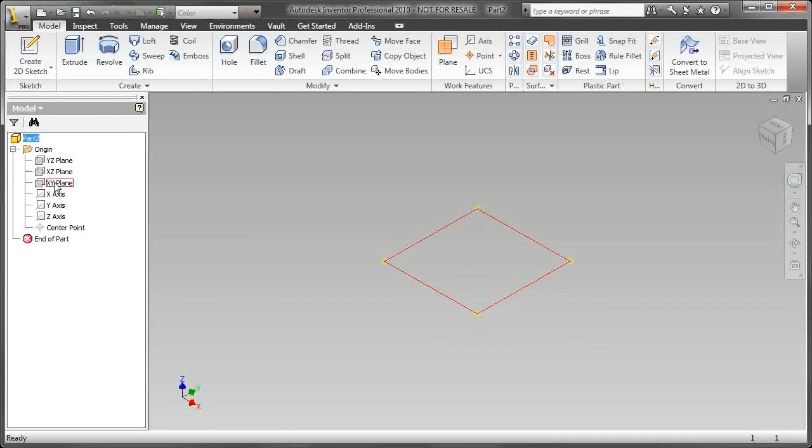Let's start a new part. I'm going to go to the new part file, and there's lots of different templates to choose from. I'm going to choose a millimeter part. And like I said many times before, I have my parts set up to where it actually prompts me to select the work plane that I want to start sketching on. And underneath the origin, we give you all the work planes that you need to start your part, as well as the axis and a center point.

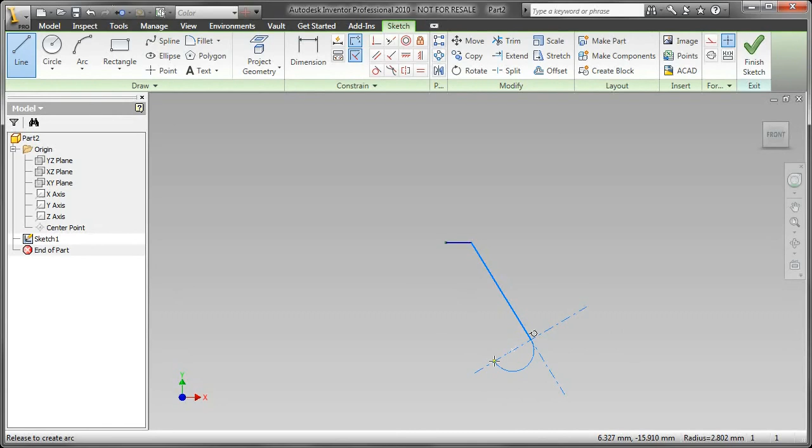Now, once I start sketching out, it automatically projects that center point forward. So when I start sketching out my lines, I have a reference point to 0, 0, and that's really important for me because I want to make sure that I know where I'm at in reference to the origin. So as I'm sketching out, of course, it's giving me horizontal, perpendicular, and parallel constraints, but it won't do all of them automatically. It does a pretty good job of doing most of them, but I want to do a couple equal constraints and a tangent constraint here.

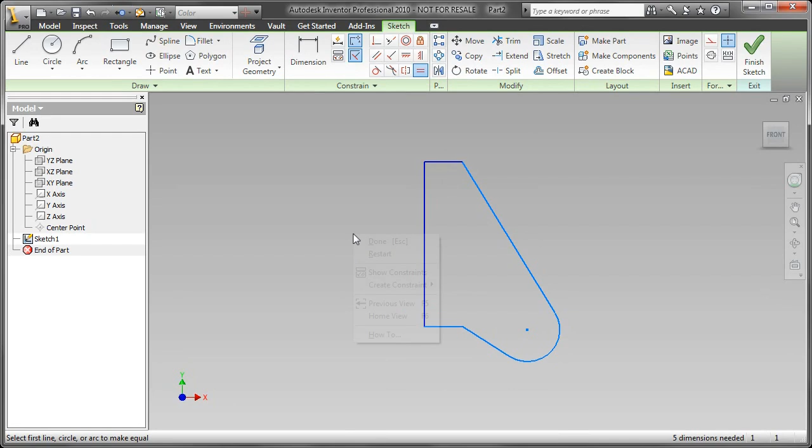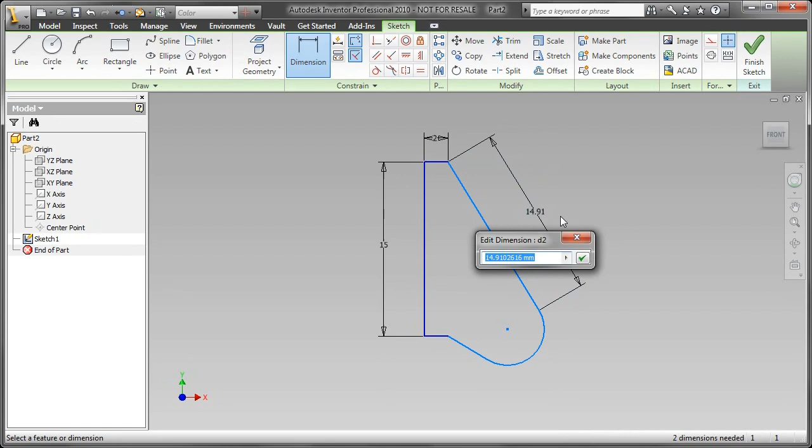So right on the sketch ribbon panel, you have access to your 2D constraints, and now I'm getting the geometry to behave the way I want it to behave. So let's place a couple dimensions, and by placing that equal constraint there, you'll see that 2 millimeter is equal down to the bottom one, just as designed, just as planned. So here I wanted an aligned dimension. If you want an aligned dimension while you're placing it, just simply right-click your mouse and the context menu will come up and you'll choose aligned.

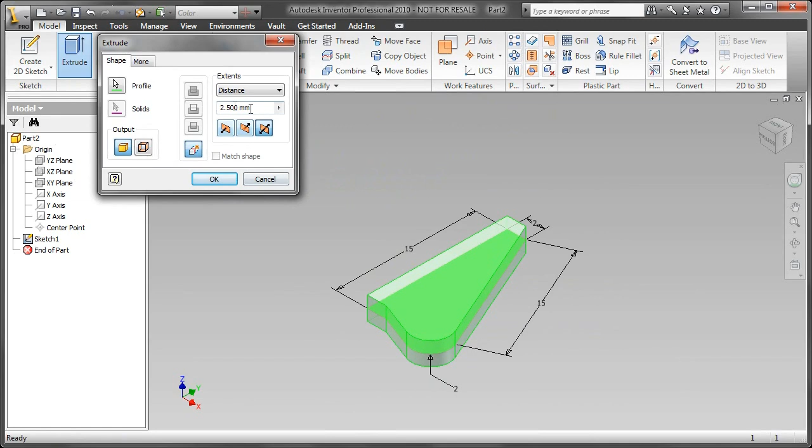All of those were done with one command, one dimension command. So even though there was a vertical, horizontal, aligned, and radial dimension, it was all done with one command. So you don't have to bounce around with a bunch of commands. So once you have the initial geometry all sketched out, go ahead and finish your sketch, and then Inventor's going to display a different set of tools. Here I'm using the extrude command. So a couple different ways to do it: forward, backward, mid-plane. Here I wanted to do a mid-plane because my next feature is also going to be sketched on that initial plane.

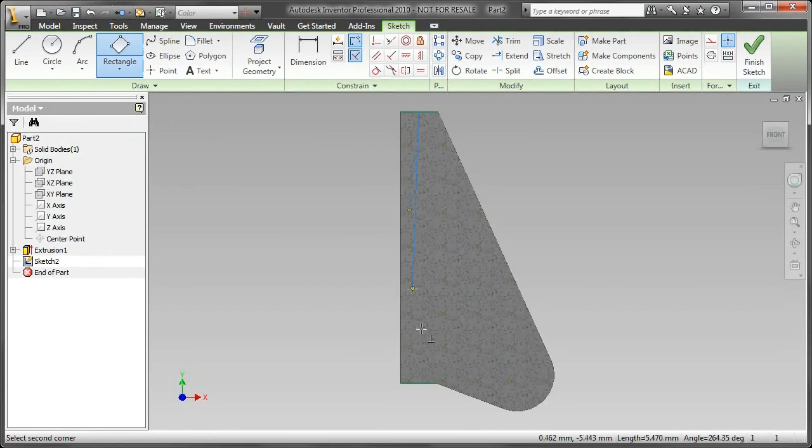Now I've cut away the graphics by hitting F7 on your keyboard. So when you're sketching on something that's kind of cutting through your part, hit F7 and it'll do what's called a slice graphics. And I've also done a project geometry of those two top lines. So I don't want to guess where this is. I want to actually project that geometry forward so that when I'm placing this geometry for the next feature, it is the actual edges of the part, so it's not a guessing game. You're not zooming in real close and making it look on the edge. It is on the edge.

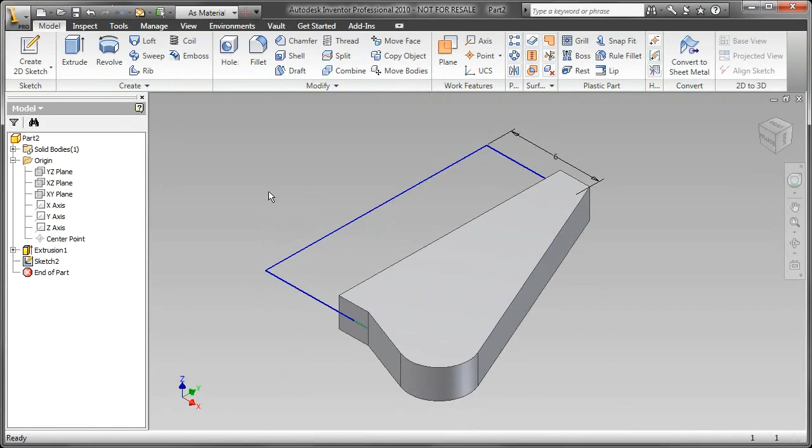So I've sketched out that profile. Next thing I want to do is revolve that around. Now when you hit the revolve, it's going to find any closed profiles that you have. If you have multiple closed profiles, it'll ask you which ones you want. Pick an axis and it'll revolve around it. Now that actual radius was too big for my design, so rather than undoing, the nice thing about parametric modeling is you can always go back into that initial sketch and change the parameters.

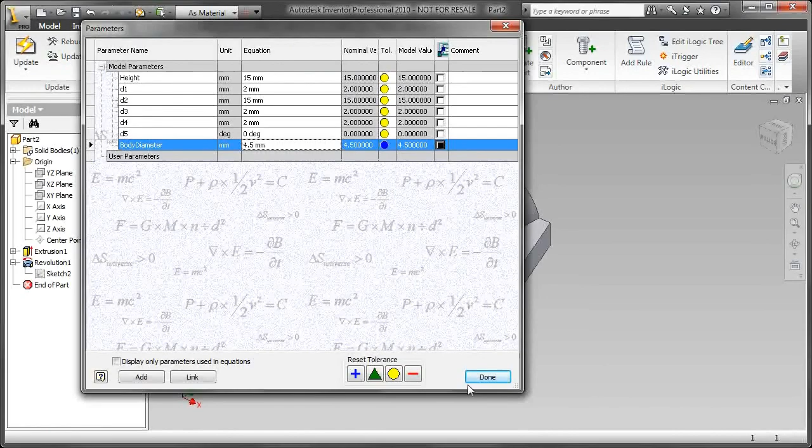Or you can always bring up the parameter dialog box and begin to add some additional levels of detail to it. So here I'm adding a reference to a height, so that part height was 15 millimeters. And then here I'm just saying that that particular dimension was what I wanted to name it. It's so small on my screen that I can't read it, which is why I'm pausing.

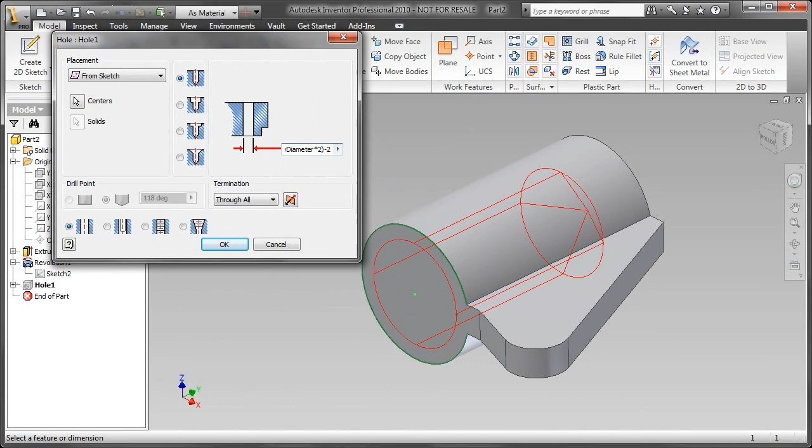Anyway, so now that I have that geometry revolved around there, I'm going to go ahead and place a hole. Now the hole is kind of a hybrid: it can be both a placed and a sketch feature, and I'll talk about that here in a minute. But here, I started a sketch, told it where it was, and now I'm going to reference that body diameter parameter, I can read it this time, and make an equation out of it. So rather than it being just a static 6 millimeters or 5.5 millimeters, I want it to be something specific.

Now the next feature I'm going to place on here is a placed feature, and what I mean by a placed feature is it doesn't require a sketch in order for you to put it on the geometry, but it does require first a solid body for you to do it. So that's why it's called the placed feature. And this time I did a fillet, and I'll go ahead and add a chamfer as well. So both of those placed features just required an edge for you to be able to execute on.

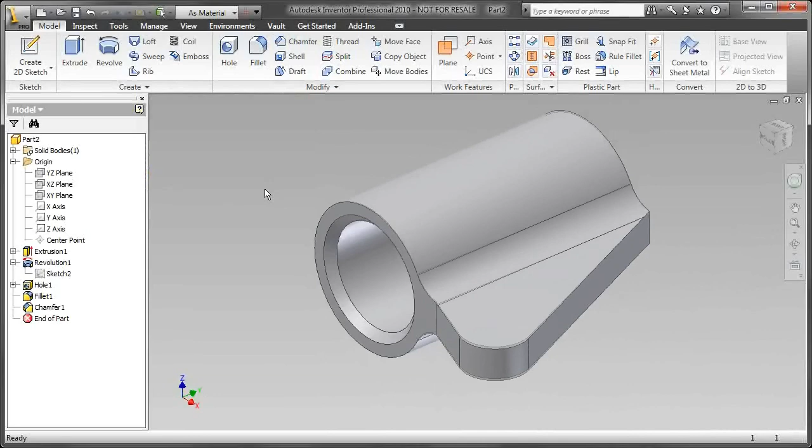Now, next I'm going to go ahead and add a hole. As I mentioned before, a hole is a hybrid. It can be both a sketch-based and a placed feature. I'm tripping on my tongue here already. So here, I didn't have a sketch, but I had a piece of geometry that I can reference. So I wanted it to be on a surface concentric to an existing round.

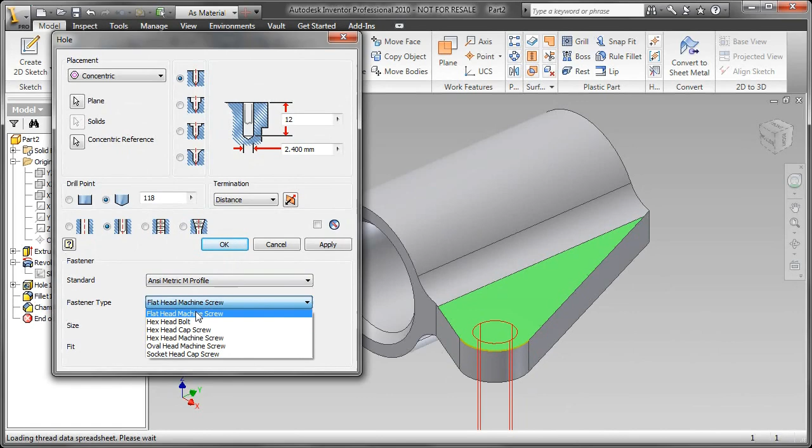And in this case, I want to add some more levels of detail to it, some additional intelligence. I want it to be a clearance hole for a specific type of bolt that's ultimately going to go through there. I didn't know what the diameter of that hole was, but Inventor's got that information built into it. And you can just tell it what type of hole that's going to be, and it'll bring in the geometry for you.

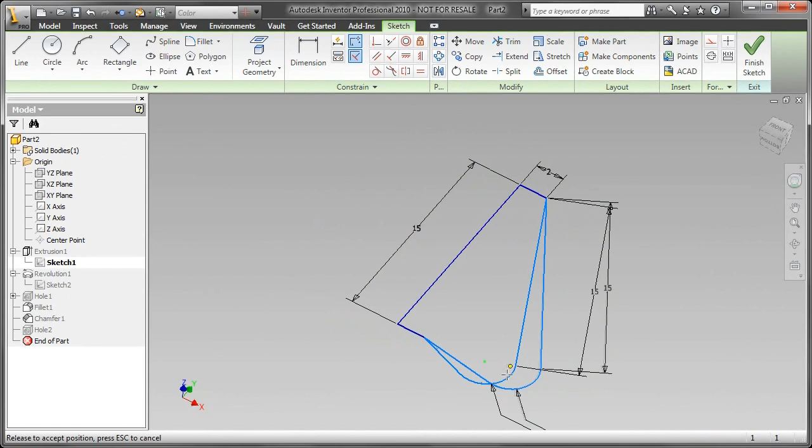Alright. Now, again, going back to the parametric model, I've got some freedom built into here, but you can always go back and make modifications to it at any point in time. So if I decided I want to lengthen that out, it's automatically updating the model and all the relationships that I built in. It was a concentric hole, right? So it followed that center point for that round when I made the change.

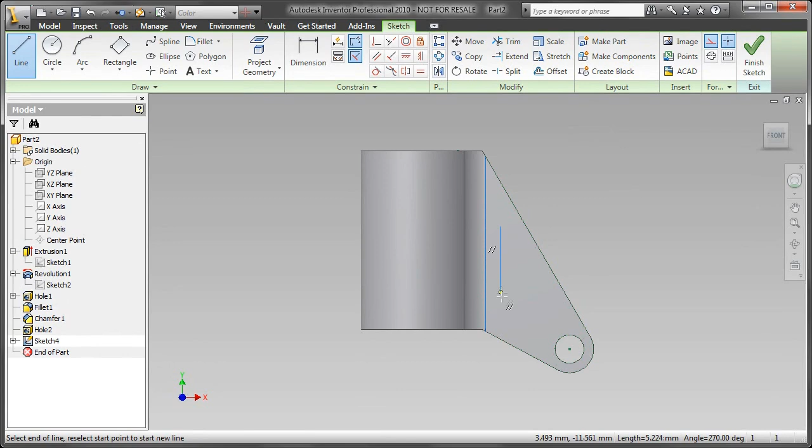Now, the next thing I want to do is create another sketch on that top surface. I'm no longer sketching on the origin planes. I'm sketching on a specific surface. Because what I want to do here is create a lightweight cutout. I need to remove some material there because there's too much material. I'm building this too heavy.

So what I've done is I've done a project geometry. Project geometry, I use that feature probably more than I use the dimension feature. I really do. Because what that allows you to do is reference the actual edges of the parts and not just guess, like I mentioned before.

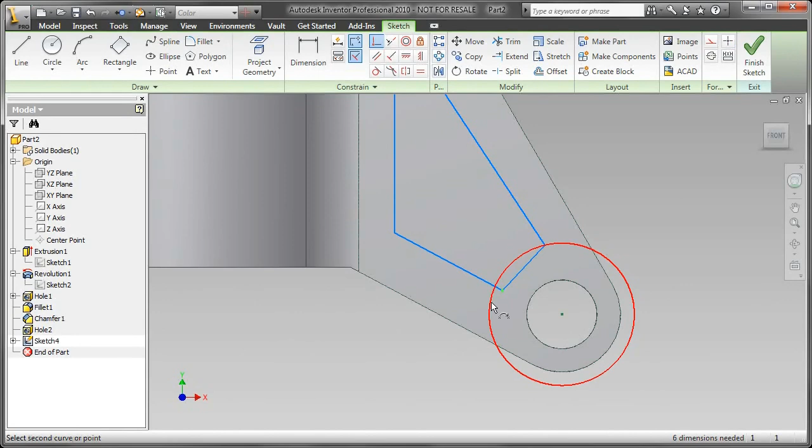And I'm bouncing back and forth between construction lines and regular lines, so they're just different line types. And when you use construction lines in your sketches, Inventor will ignore those when it comes to placing a feature. So it's a real handy tool for placement or just positioning your sketch relative to other pieces of geometry when you need geometry and a constraint won't do.

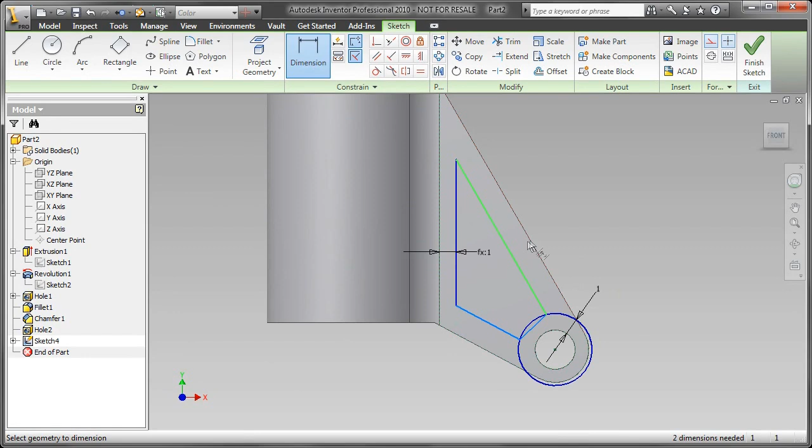So I've placed a couple more. There's a parallel constraint. There were some coincident constraints, so I can get this cutout positioned exactly where I want. And I did a couple offsets, and here I'm dimensioning what that specific offset will be. Well, rather than doing 1 millimeter all the way around as individual parameters, while I'm placing dimensions, I'm going to reference that one. So that if I want to change that offset somewhere down the line, I only have to edit one parameter rather than the 4 that you see here on the screen.

So I'll go ahead and extrude that, and I'm going to cut out some material here. And let's just real quick add a fillet. You've already seen me add a fillet, so I won't spend too much time here. But what I do want to point out is that you don't have to always select edges. You can change this to a loop, and it'll grab all 4 of those lines in one selection rather than clicking them one at a time.

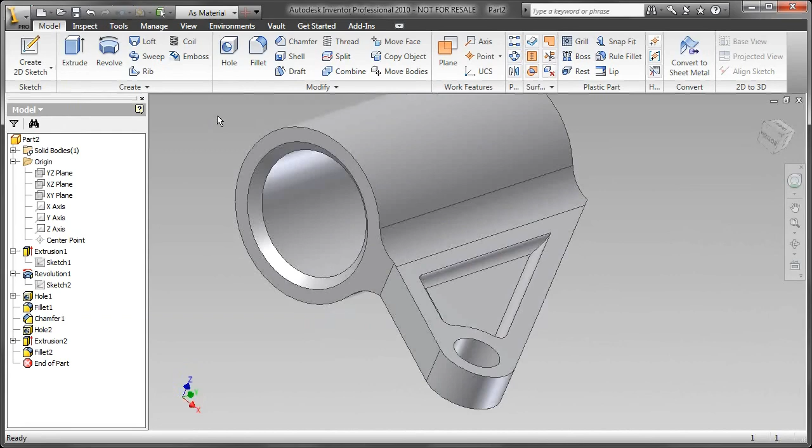Now I've got that cutout on the top, and I've got the fillet. I want to match that same thing on the back side of this without having to redo every single one of the features that I just did. I don't want to resketch it, and also I want it to update if I make any changes to it. So I'll utilize the mirror feature. The mirror feature is going to ask you what are your features and what is your mirror plane. Well, since I based my first sketch off the XY plane, and it was a mid-plane extrusion, I don't have to go about creating a work plane just for that feature. I can utilize some of the original ones.

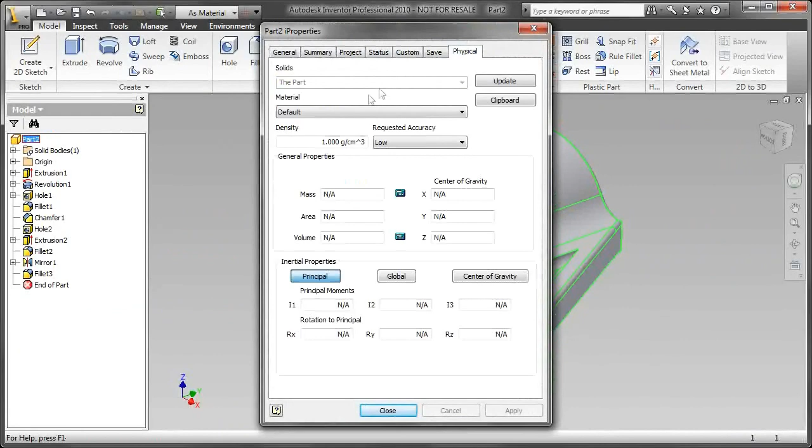Now let's real quick go in here and add some additional properties to this. I want this part not only to look like but also behave. If I go into the FEA environment and perform some analysis on this, I want the material properties passed along. So let's go ahead and add the actual material properties to it. Maybe change the way it looks, add a perspective view. Hold down Shift and Control and roll your wheel back and forth to change the perspective angle. I got a pretty killer part going on right here.

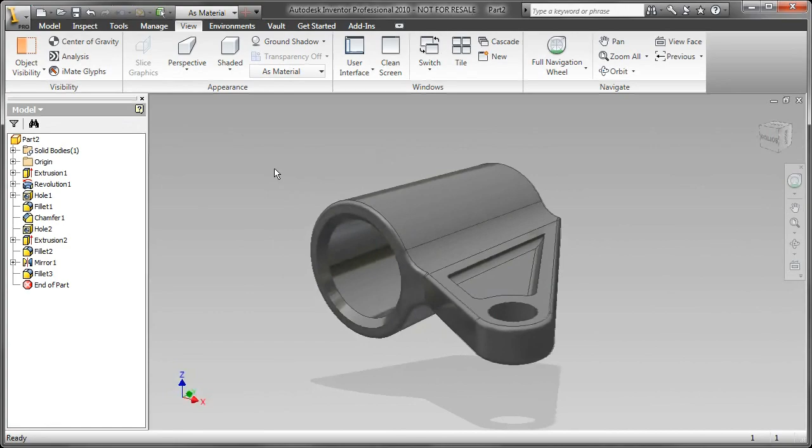So that's it, man. That's basic fundamentals.